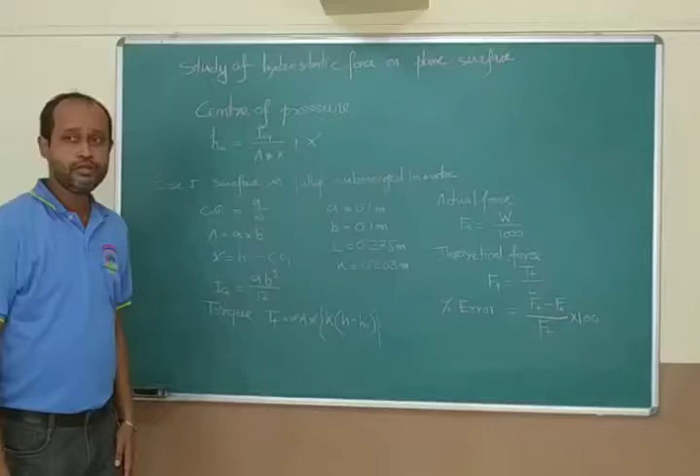Perform a practical study of hydrostatic force on a plane surface.

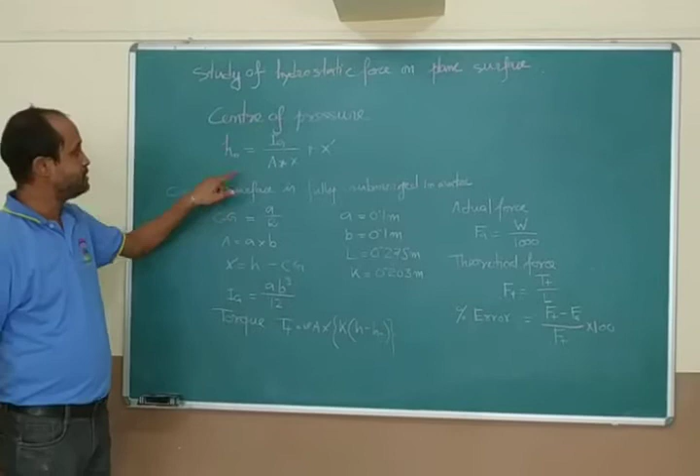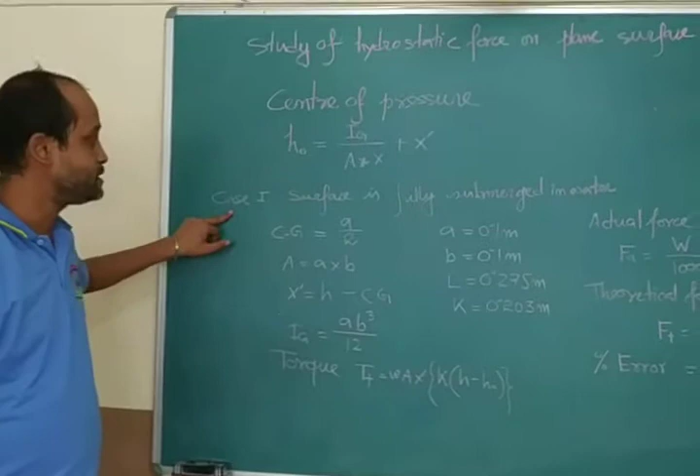For that purpose, the required formula is: center of pressure H naught is equal to Ig by A into x plus x dash. So here you will get two cases: number one is surface fully submerged in water, or surface partially submerged in water.

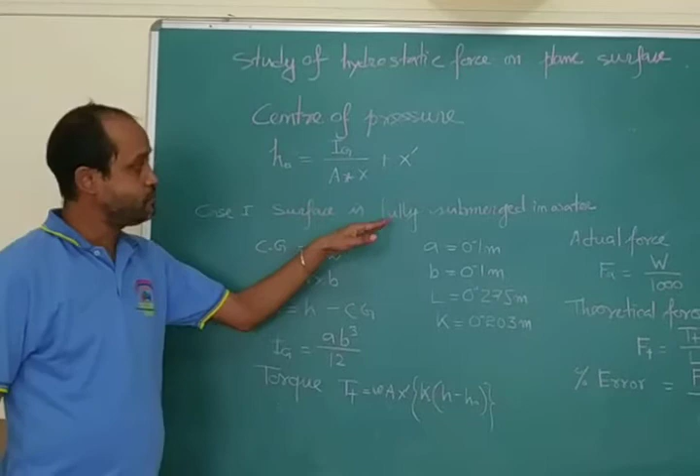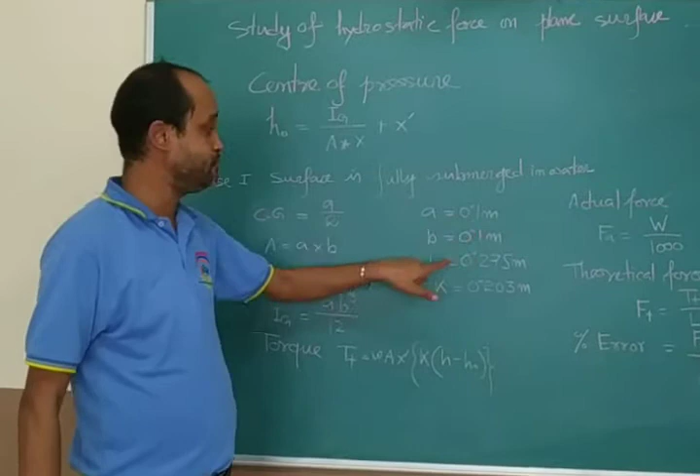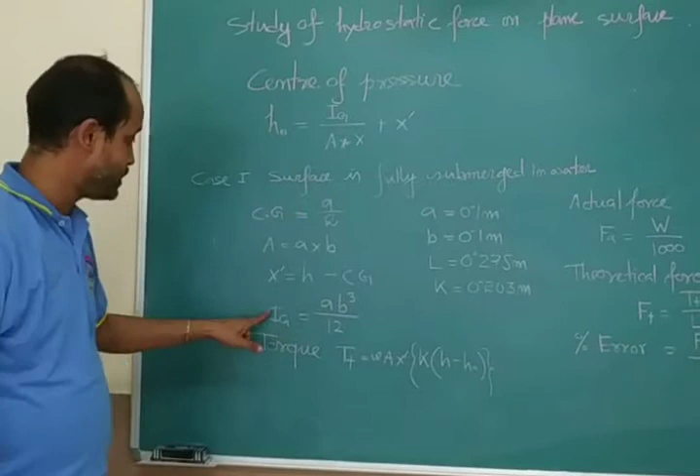For a surface fully submerged in water, the formulas will be: center of gravity is A by 2, area is A into B, where A is 0.1 meter, B is 0.1 meter. X dash is equal to H minus CG, where H is the height. Ig, the moment of inertia, will be A b cubed by 12.

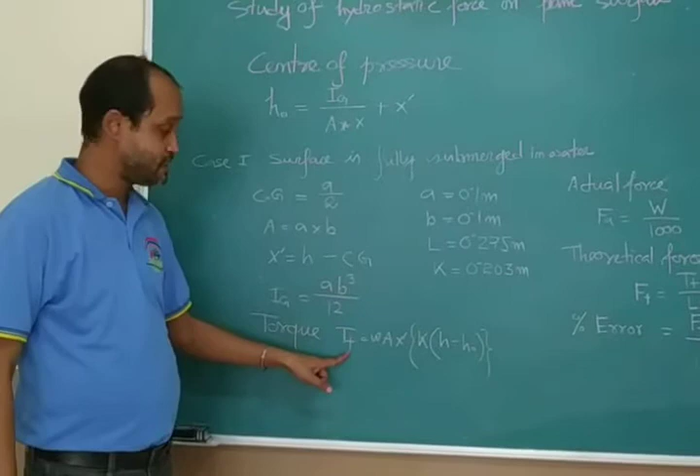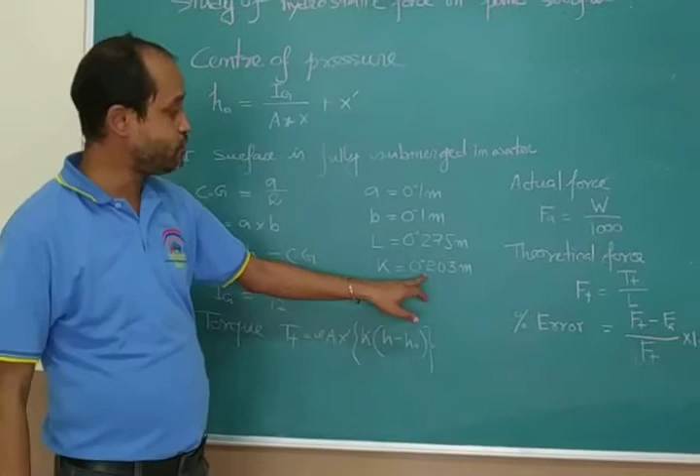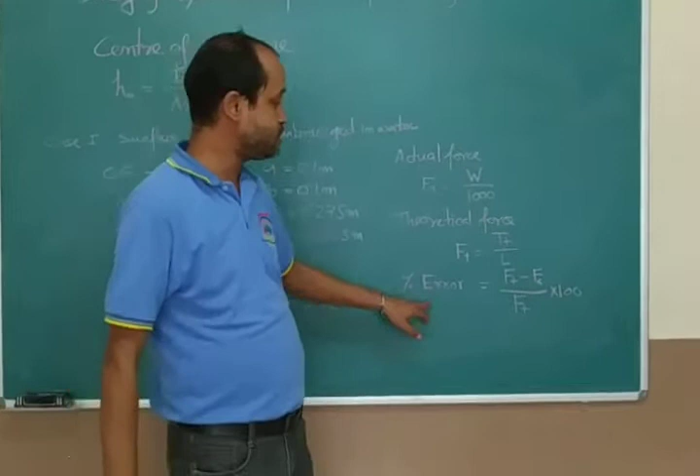Now torque will be, this is a theoretical torque, capital T suffix small t, equal to omega A x bar into k, h minus h naught, where k is 0.203 meter. Actual force will be W, the weight, divided by 1000, and theoretical force will be T, the theoretical torque, divided by L, where L is the perpendicular leg, 0.275 meter. Error, percentage of error, is Ft minus Fa by Ft into 100.

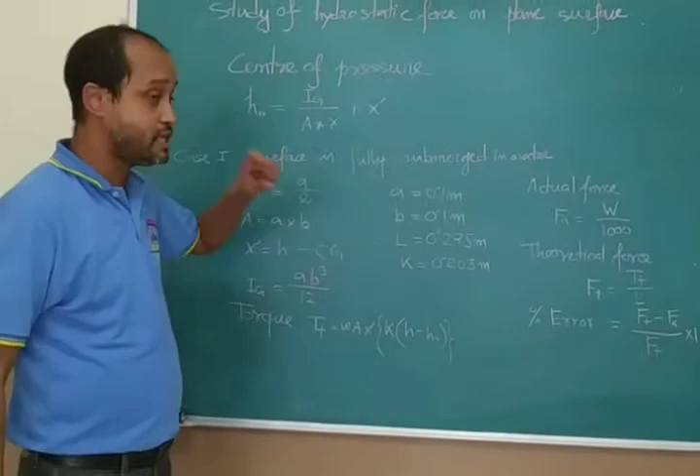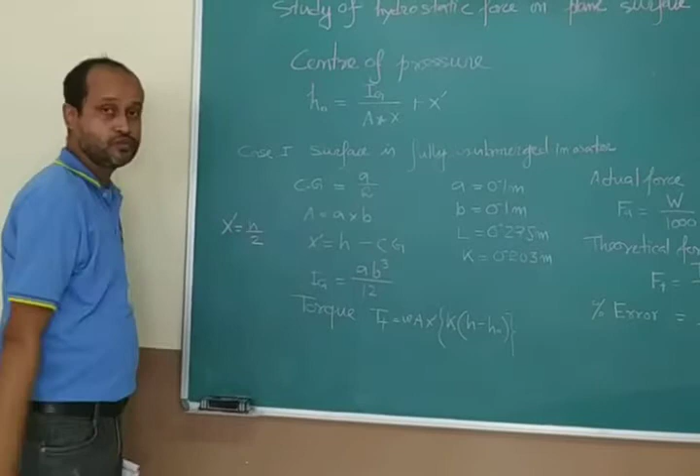When this particular surface is partially submerged, the only difference you will find is your x dash will be h by 2. That is the difference.

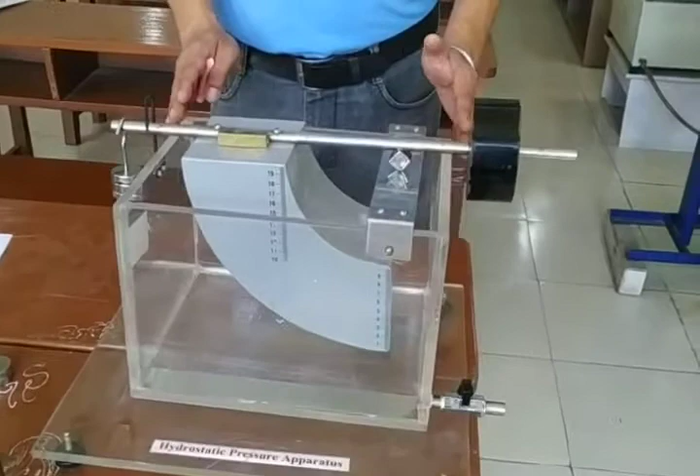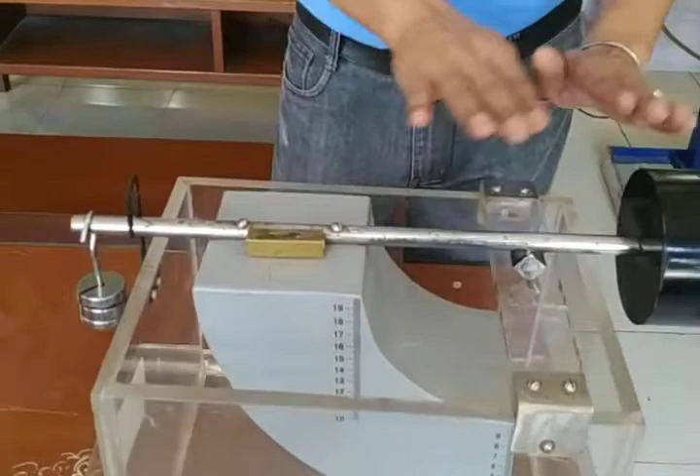So dear students, this is the setup where you get one small vessel where we can pour water. This is your surface, this is your counterweight, this is your balance weight. Initially we put the counterweight and the applied weight in a horizontal position. Look here, and after that we have to apply load.

So initially we applied 100 g here. Now you see this whole setup has been tilted. Now you have to pour water here to balance it. Let's pour the water.

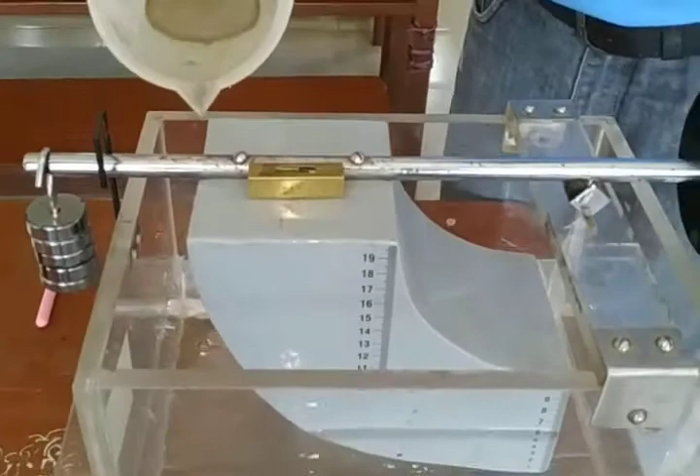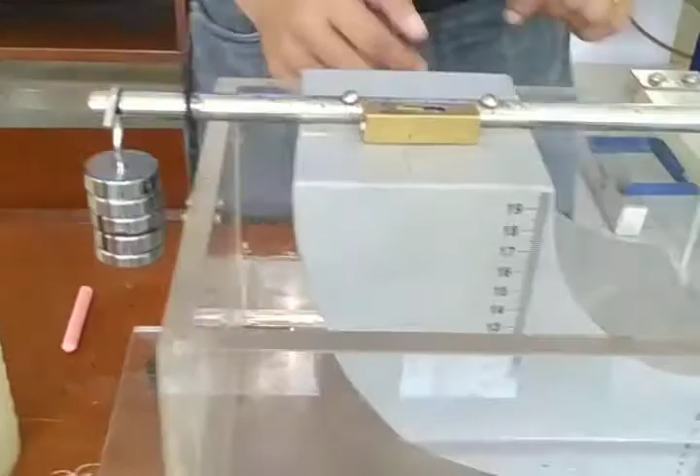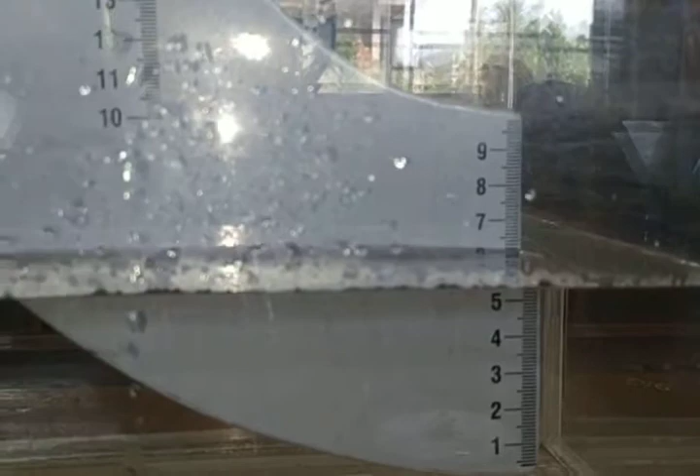So here if you observe, it is balanced now. After that we have to take the readings. We have to take two readings: one is applied load, where it is 100 g, and the reading of the water level. If you observe the reading of the water level, it is almost 6, that is 6 centimeters, 60 mm.

So weight will be, applied weight will be 100 g and 60 mm. Similarly we apply another weight, let's put another 100 here, another 100 here. So this is your another 100.

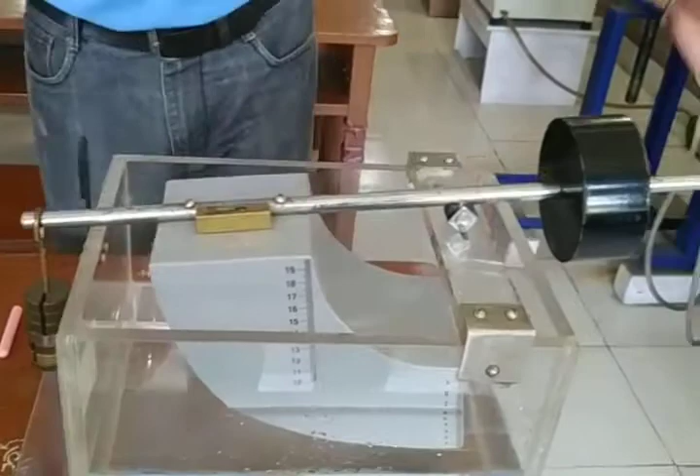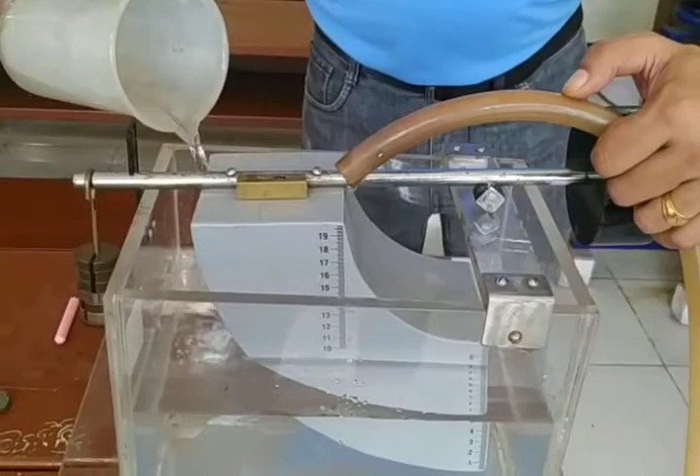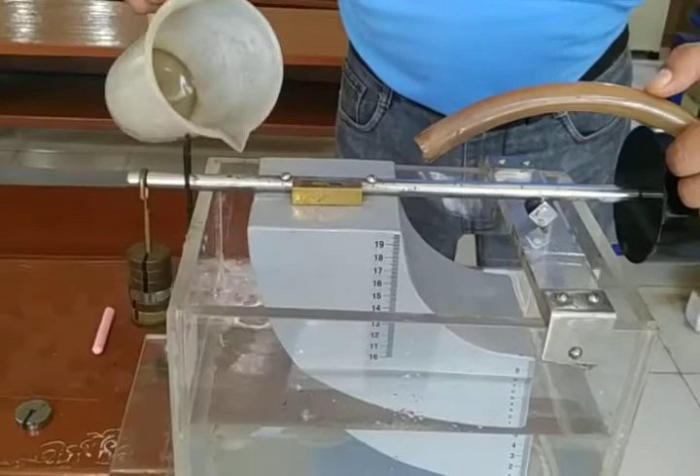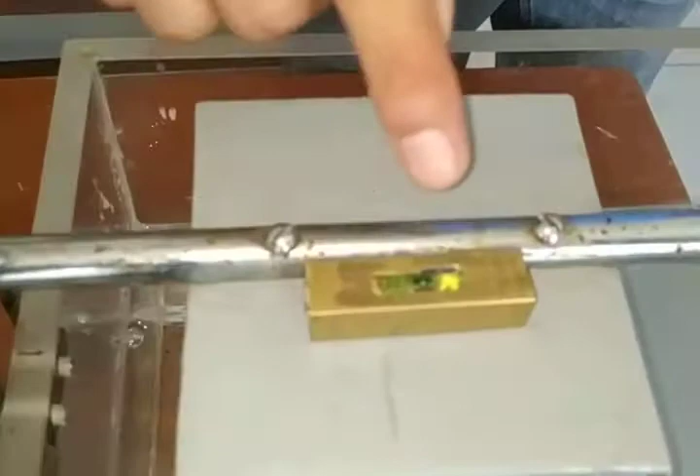Now you apply water once again, pour water in the bucket. If you observe here, it is almost balanced. So here we are applying 100 plus 100, that will be 200 g, and the reading will be how much? Tell me, 85. Almost 85, so 85 mm.

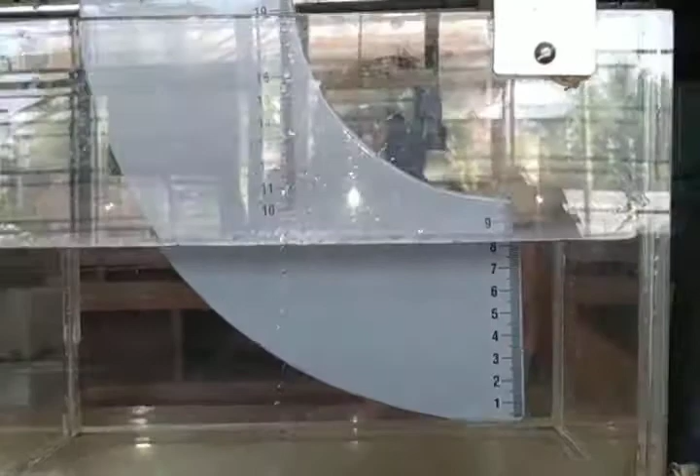So if you observe here, your body is partially submerged. This is your water level, this is partially submerged. And if you pour the water more, then it becomes fully submerged.

So we have already taken 2 readings for partially submerged. Let's apply more weight here. Once again we are applying 100. Now, if you look here, it is now balanced, and your surface is also fully submerged.

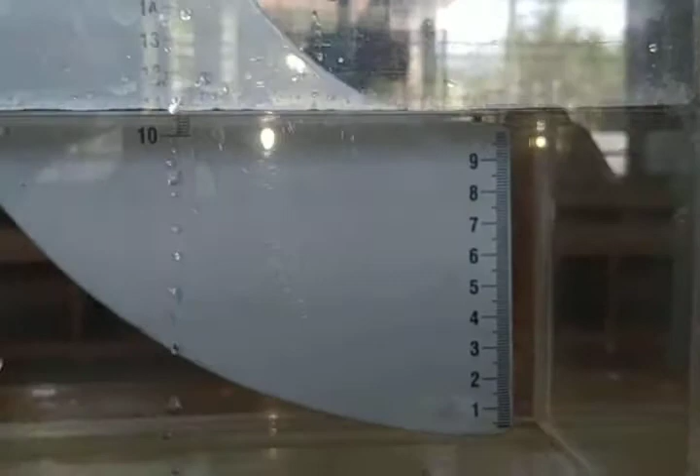Your surface is also fully submerged. The reading will be almost here, you can say how much? 105. So it will be 300 gram and 105 mm, which is, this is your partial, this is your full.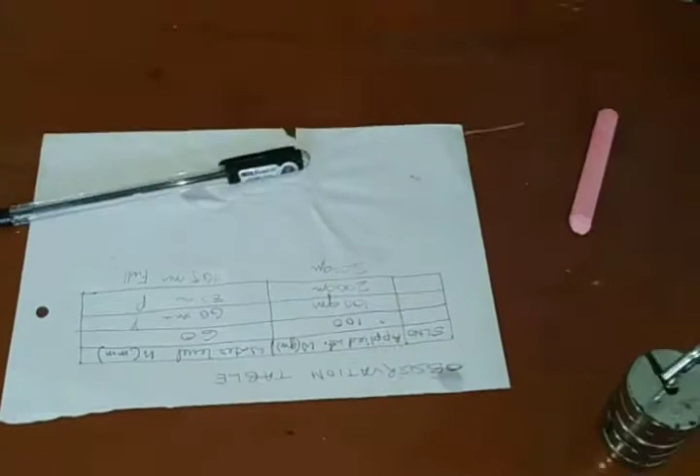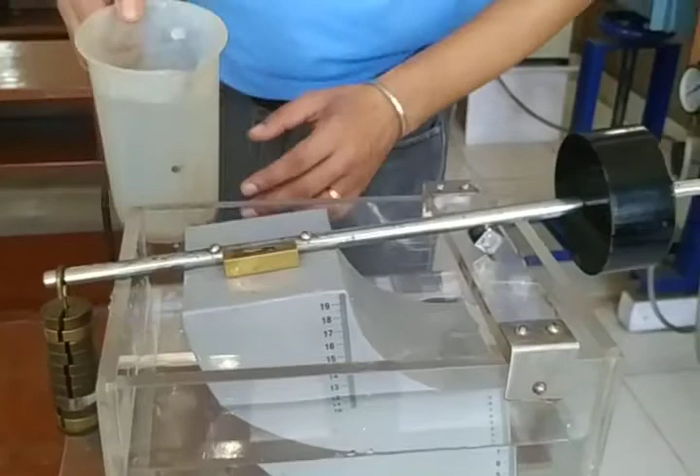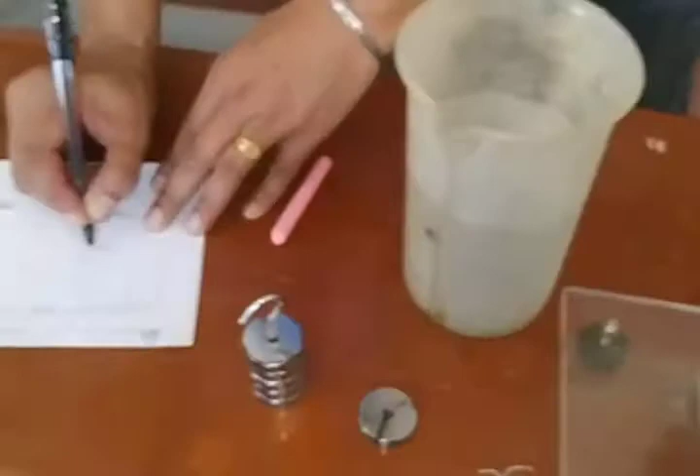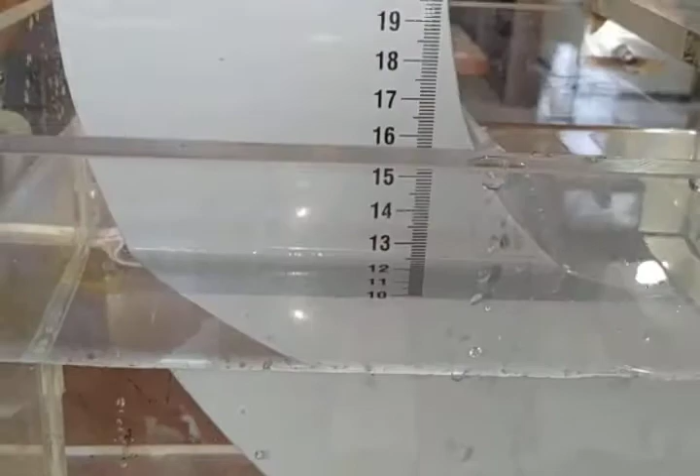Again we take one reading, for another 100 gram, and pour water here also. Now here we are applying another 100, so this is 400 gram, and the reading will be 125 mm. So here we get two readings for partially submerged bodies, and two readings for fully submerged bodies.

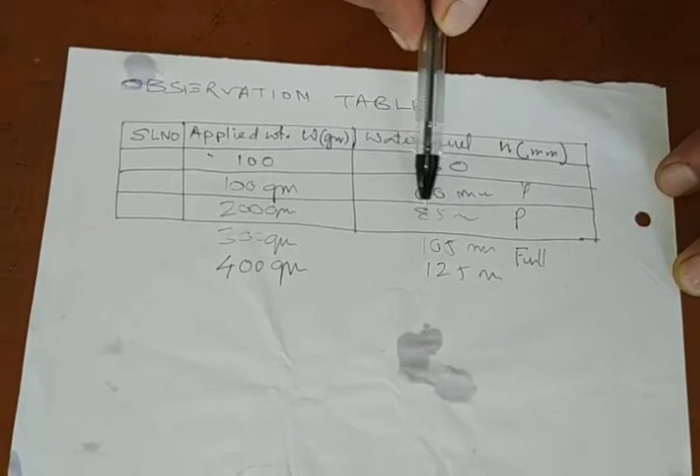So by taking these readings we can calculate the center of pressure and torque required, the actual force, theoretical force, and the error. So this is the reading: 100, 200, 300, 400 grams, corresponding to 60, 85, 105, 125 mm.

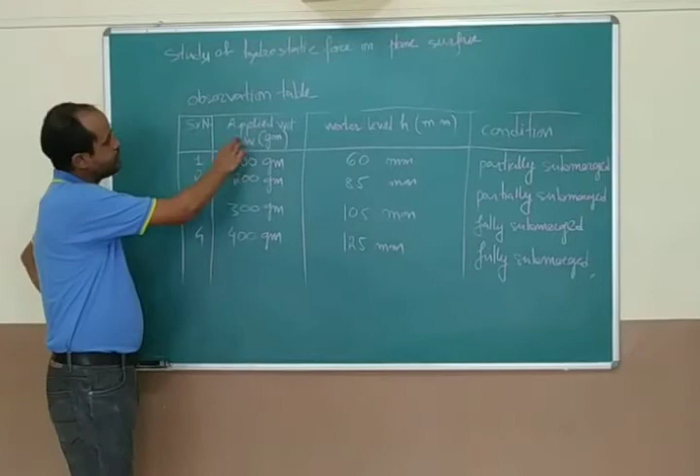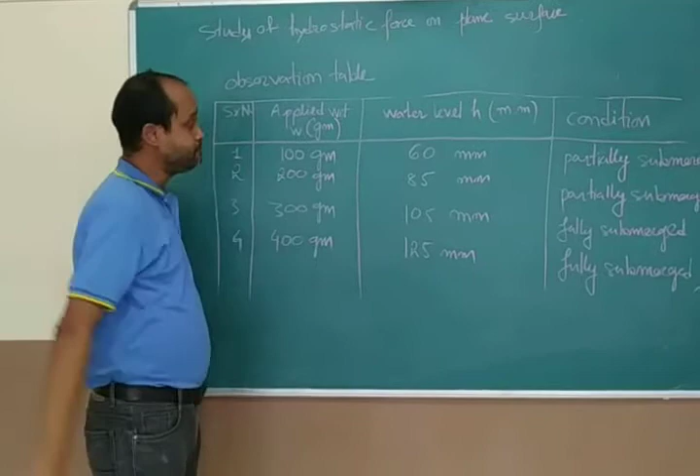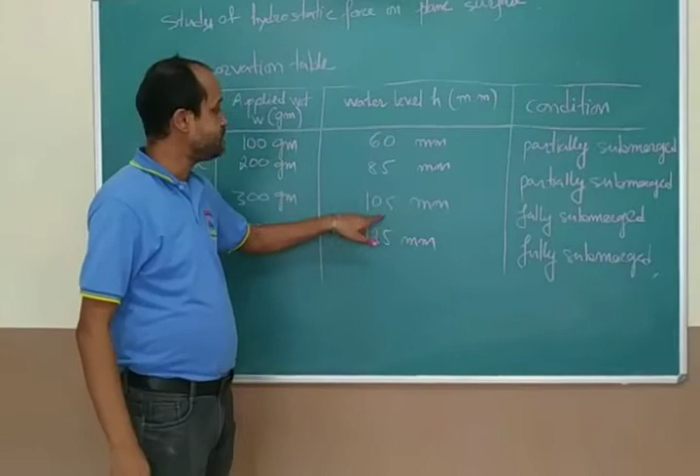Dear students, after doing this experiment, we will get 4 readings. First, applied load is 100 gram and water level is 60, condition is partially submerged. Next reading is 200 gram, 85 mm water level, also partially submerged. Next reading 300 gram, water level 105 mm, which is fully submerged. And last reading 400 gram, 125 mm, which is fully submerged.

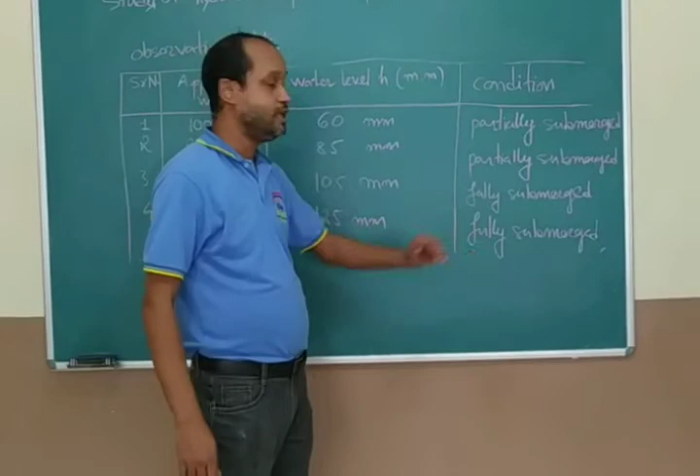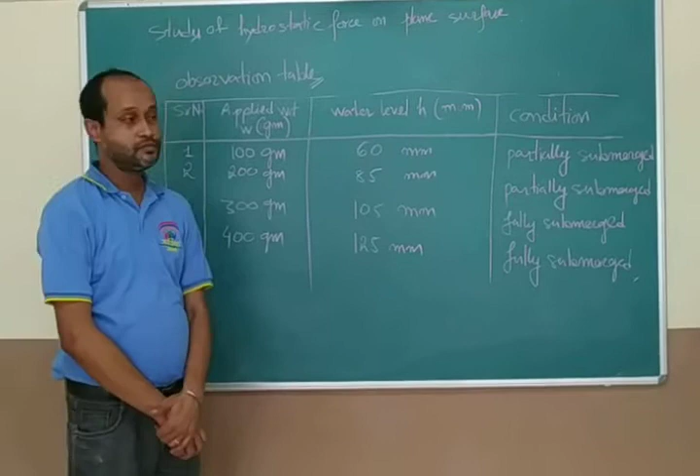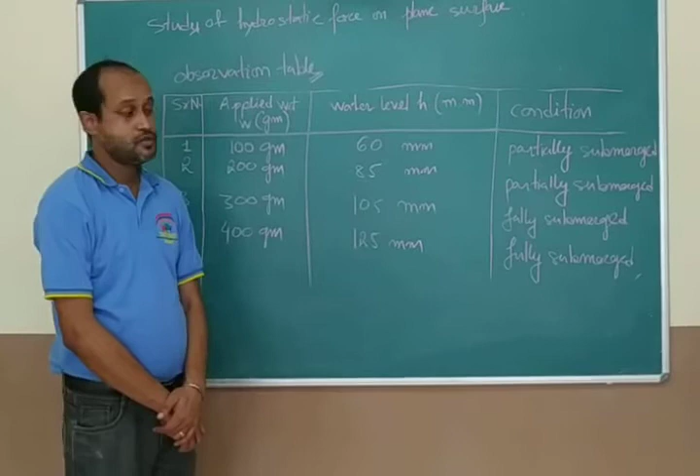Now you have all the data from the observation table. You have to calculate center of pressure, theoretical torque, actual force, and theoretical force. Those formulas are already given in the manual. So please perform the calculation table and submit the same in the Google Classroom.